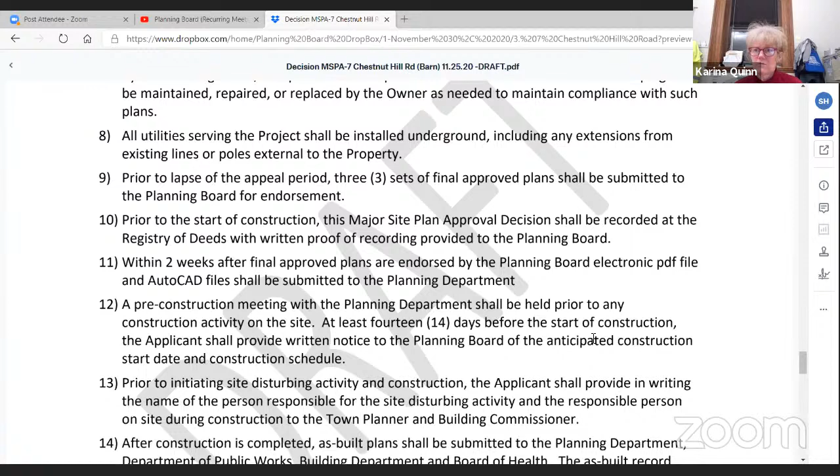We add this condition now so that there's no confusion in the future, people not being able to find information on the project when they do title searches or whatever. That's become kind of a standard, and that's just the decision, not the plans.

Number 11: within 2 weeks after the final approved plans are endorsed by the planning board, an electronic PDF file and AutoCAD files shall be submitted to the planning department. That's to make sure we get a signed copy back in electronic format to reduce our paper loads here at the townhouse. Number 12, standard boilerplate: a pre-construction meeting with the planning department shall be held prior to any construction activity on the site.

At least 14 days prior to start of construction, the applicant shall provide written notice to the planning board of the anticipated construction start date and construction schedule. Number 13, also standard: prior to initiating site disturbing activity and construction, the applicant shall provide in writing the name of the person responsible for site disturbing activity and the responsible person for the site during construction to the town planner and building commissioner, so that if we get complaints or need to follow up if there's a storm or whatever that impacts.

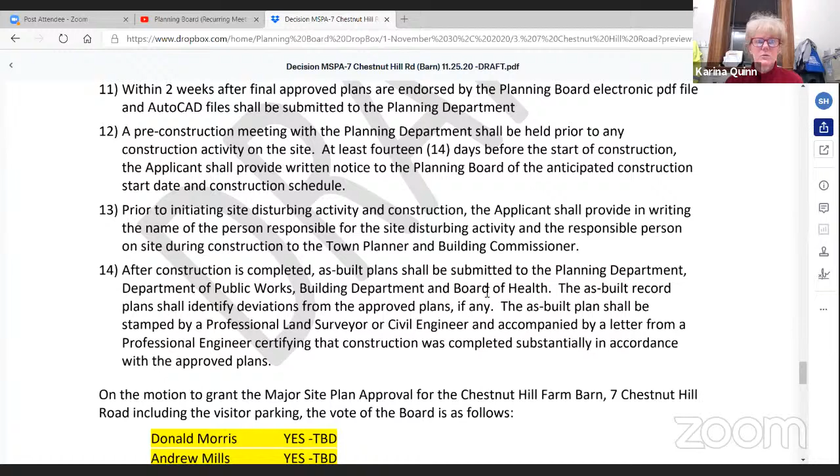Number 14: after construction is complete, as-built plans shall be submitted to the planning department. That's a standard requirement, as well as to the DPW building department and Board of Health. And those will be a total of 15 conditions, because we added one between 7 and 8.

Okay, so unless somebody has an objection, then we would entertain a motion to accept these, to include these conditions as written and/or revised.

Mr. Mills, I make a motion, we accept the conditions for 7 Chestnut Hill Road as reviewed and amended this evening. Seconded. Motion's been made and seconded. Any discussion? Bob, DA, all set? Yes. Hearing nothing else, all in favor: Morris, yes. Mills, yes. Stein, yes. Latrell, yes. Hoolahan, yes.

Okay, so we've gone over all the materials, the waivers and the conditions. So it would, unless, we'll give the public and ourselves an opportunity to add anything else. And if not, we would entertain a motion to close the public hearing. Anyone else? Questions, comments?

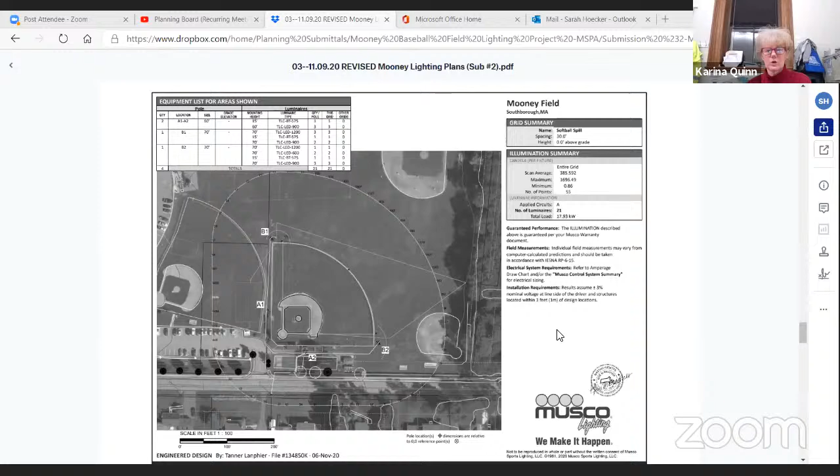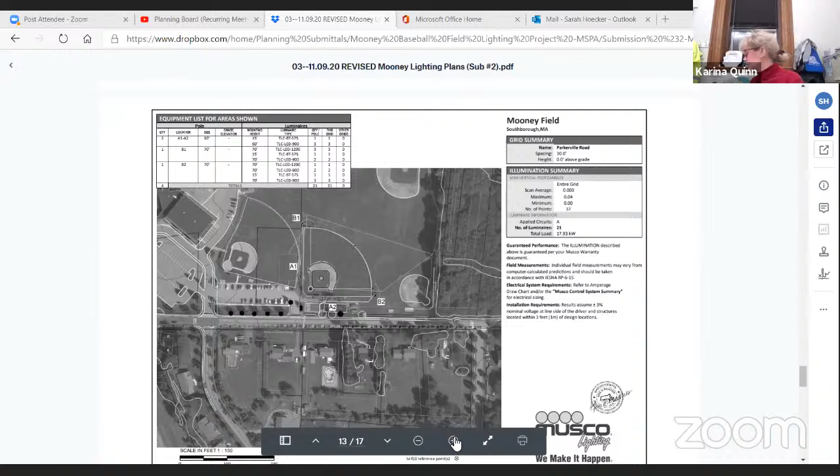But here, you can see on the screen, if you look at the bottom center, there's an A2. You got to keep going a couple more sheets down. Right here, stop, either one of those. See, one is this, right there. Stop right there, that's horizontal foot candles. If you look south of the A2 label, right there, it'll say 0.04 or 0.02. So that's across the street, and there are streetlights there. That's all I'll add to that.

In terms of adding shielding, if you've been in these meetings, all of our fixtures come with shields. We have looked at this 6,000 different ways to reduce the spill beyond this. To be at 100th of a foot candle that close in proximity to the field, there isn't any way to reduce that anymore. As Karina just said, we went out multiple decimal points here showing what the actual is. The reality is that's dark, it's black to be at that many decimal points out beyond 0 foot candles.

Anything else, Marnie? Well...

My concern is that our bylaw says 0. There have been issues at Choate Field, and those abutters are much further away. I think we should do everything we possibly can to protect those abutting properties. They're very close right across the street. There's not, you know, huge trees or anything in their front yards to shield them from the lights.

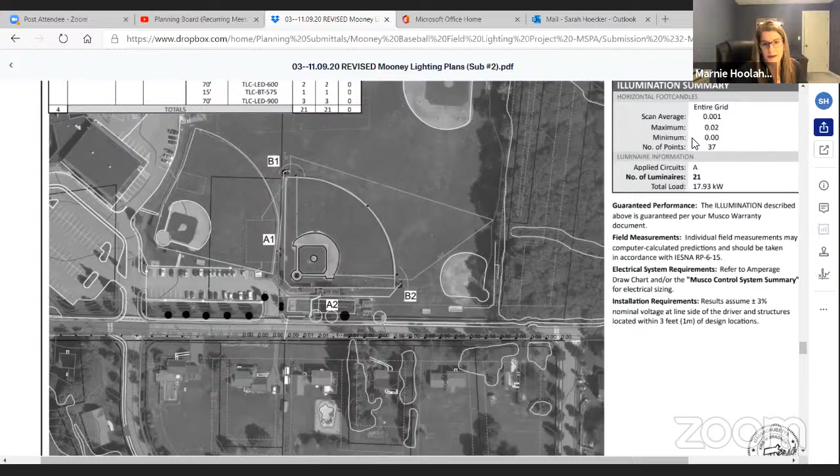Did Mrs. Hoolahan speak to this? I'm fine with the waiver as requested. Mr. Mills? Moved, seconded. So the motion to grant the waiver has been made and seconded. Any discussion?

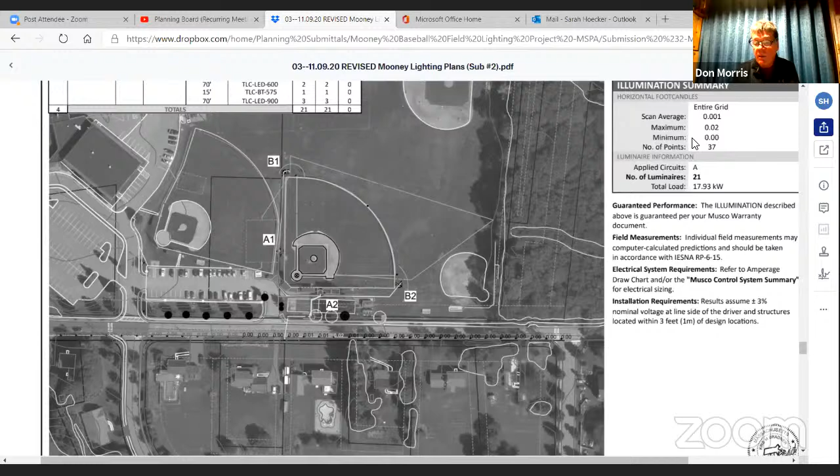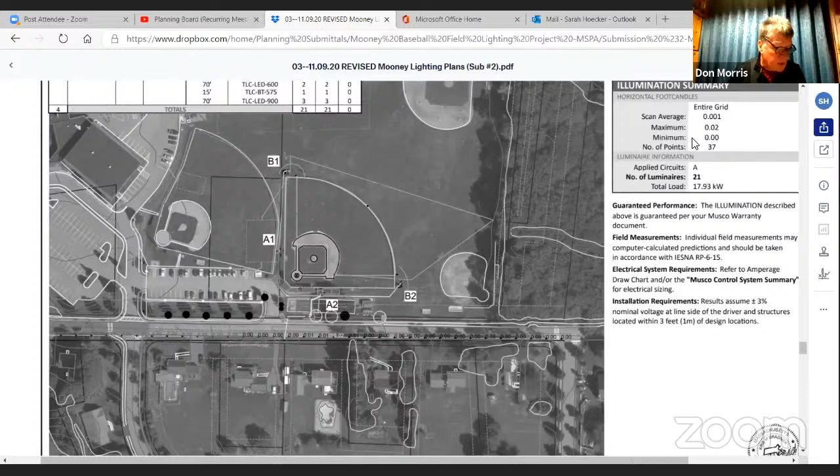All in favor: Morris, yes. Mills, yes. Stein, yes. Latrell, no. Hoolahan, yes. 4-1. It's been granted. So are there any other waivers?

Nope, that's it. No, that was it for the waivers. Agree with that, Tim? Oh sorry, yes, agreed. Okay, so...

We want to go down through the draft conditions. The reason we do this is to discuss them and give you the opportunity to disagree or agree. But again, the vote relative to the conditions would be after we close the public hearing.

So Karina, you want to take us down through, let's see, seven conditions? The ones that are highlighted? Oh yeah, I got the pages in the wrong order. I'll go through the boilerplate ones really fast and we'll just stop at the more specific ones. Sarah, if you want to put the draft up there, thanks.

That's up to Andrew. Andrew, do you want to see the revised plans? Can you share it right now? Sarah, can you give control over? Yep, Art, you should be all set. Can you see that? Are they up? Probably not, hold on. Yeah, we can see them. Oh, you can see them? Yes, did I just move them? Hold on, wait, can you see those? Yes, very small, okay hold on, working on it. And Seattle's winning, I see too. Oh yeah. Hold on one second, of course they're frozen. Hold on one second, I'm going to stop sharing for a second, just so I can.

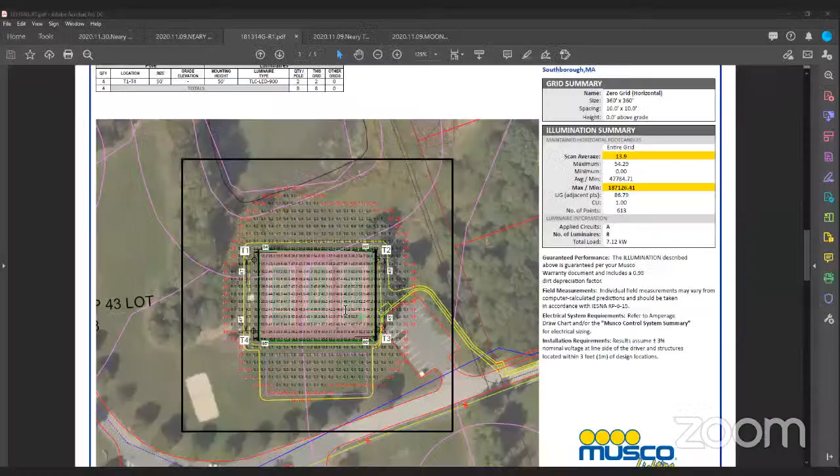All right, can you see that? Is that better? So this is the horizontal at zero grid - you can see it's 0 feet above grade on a 10 foot by 10 foot spacing. The red numbers indicate the zeros and the spillage. This is the property line, this far line; this line is the easement. We're not even inside of the existing tree line, still at zero grid. You have these trees here which will create a buffer, and a heavy tree line along this edge that'll create a buffer, so we don't spill into that property line. And then the vertical grid at zero - same thing, the red numbers represent the zero. Again, we're not within that existing tree line other than the existing trees that are there. We're off the property line for that area, and outside of the setback, so we don't even encroach on the setback. Okay, so that's good - if you put those in the final approved set, that solves that comment. I would indicate the same, that this would be stamped by Vinny. I guess we would need to do the same thing. Correct.

Mimi, while we have this up, and also Jesse, any questions on the photometric plan? No questions, all set. Okay. I have one question - I'm just curious, I see from the western side, why does the light trespass go further over on the far left court? Why does it go further off than the other one? I'm just curious.

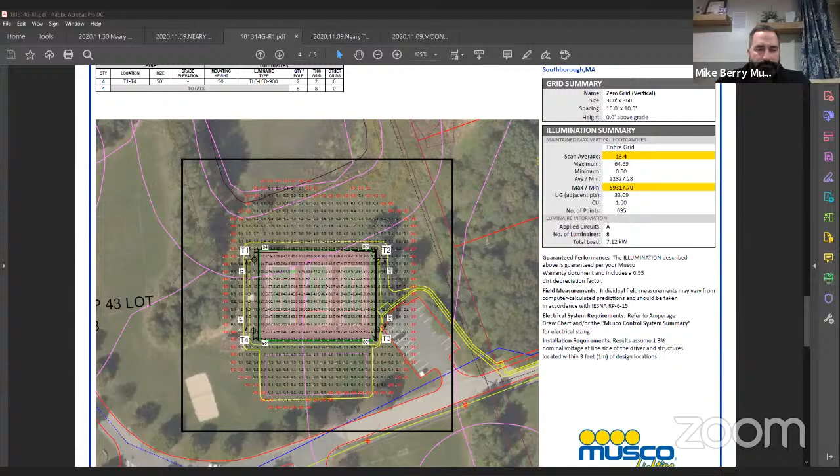You can also see that in the green number in the middle. You have a 64.7, which is kind of like what we call a little bit of a hot spot. It's not quite a hot spot, but you're getting more light concentration in that area to cover further across that court. So we adjusted some of the light pole distances to deal with existing conditions - we have an existing path coming from the parking lot, so we had to shift that pole in, and you get some different light distributions from that.

Thank you. All right, we can go to the next one.

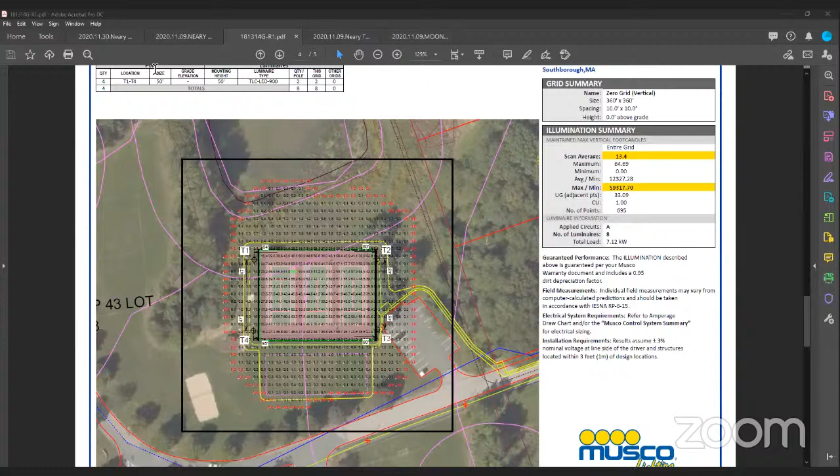Hold on one second, I'm just trying to open my comments. The next one, so we went through that - the next ones were all related to the controller. So the next comments were really regarding number 41, A, B, and C. They were related to the controller, which we discussed. Again, the controller would be the same.

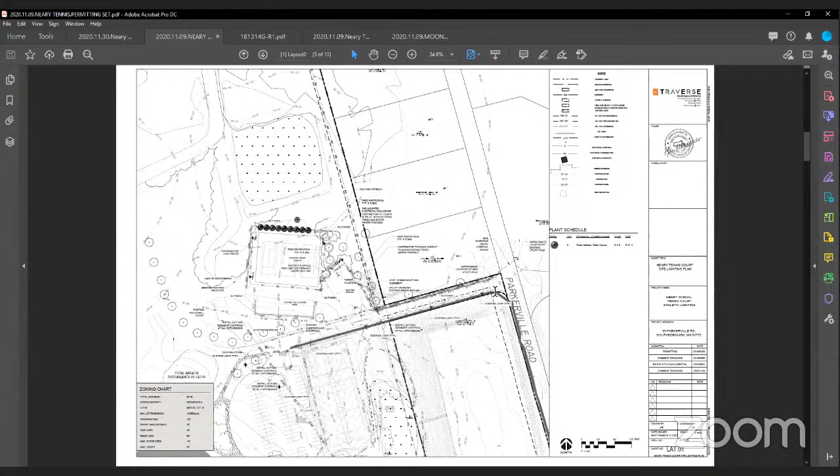The rec department has the ability to set and manage that controller to meet the guidelines of the zoning approval. There was a question about details for the controller. On part A, they agreed to add a note on the electrical plans that will refer to G101, which refers to the zoning board criteria - their order of conditions. That's on the notes on our plans, so in that reference we would be referring back to the notes for the conditions of the zoning board approval.

Part C discusses control devices. Again, all the lighting control devices are part of the Musco package, so it's a complete package, and the timing will be controlled by the rec panel. So anything in the zoning board appeals will be able to be set by the recreation.

Parks and Recreation. And then the last one was about the controller box - if it's a NEMA 3R enclosure, it is a NEMA 3R enclosure, and control is weather resistant. It's on the same pad as the transformer, it's rated to be outside, and we can show that on the plans.

So just for my clarity, because I have a mixture of memory from when this originally got approved from the CPC - a prior director explained how the lights would work. When the proposal first came to us on the CPC, we were told that individuals who wanted to play could turn on the lights so they could play, but they go off at a certain time. From what you just said, it sounds like someone's going to have to call Tim and say, hey, can I play tonight, and we haven't turned on. Is that right?